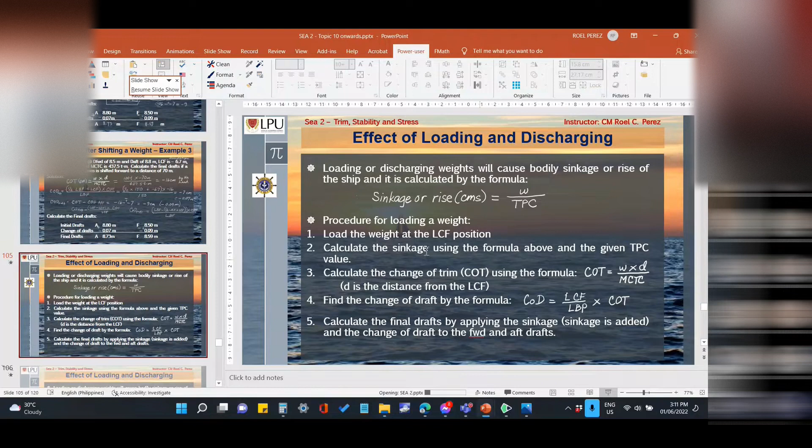Tons per centimeter immersion, or TPC, as the term itself suggests, is the number of tons displaced when the vessel is immersed by 1 centimeter.

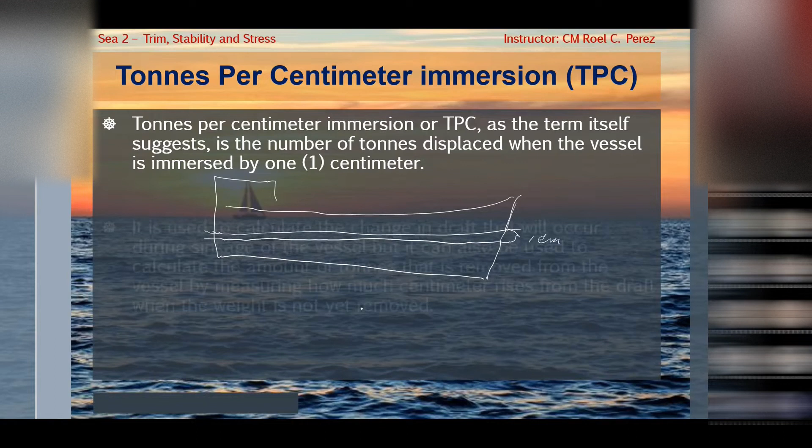So if you slice the ship by 1 centimeter, then weigh the water inside that slice, that is the TPC, which is already tabulated, and I will show you.

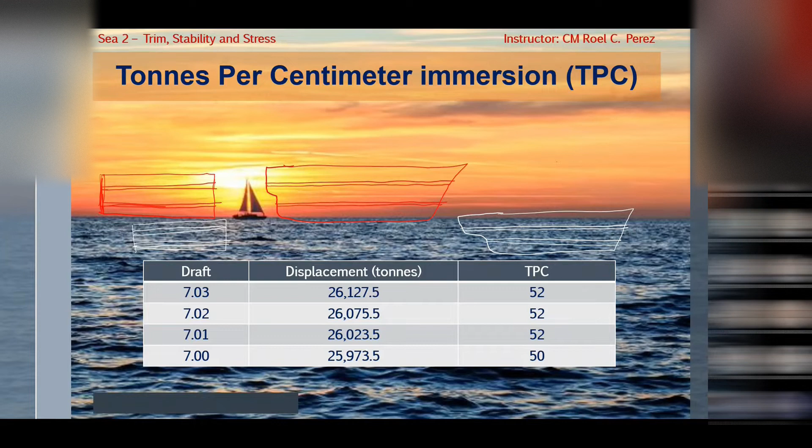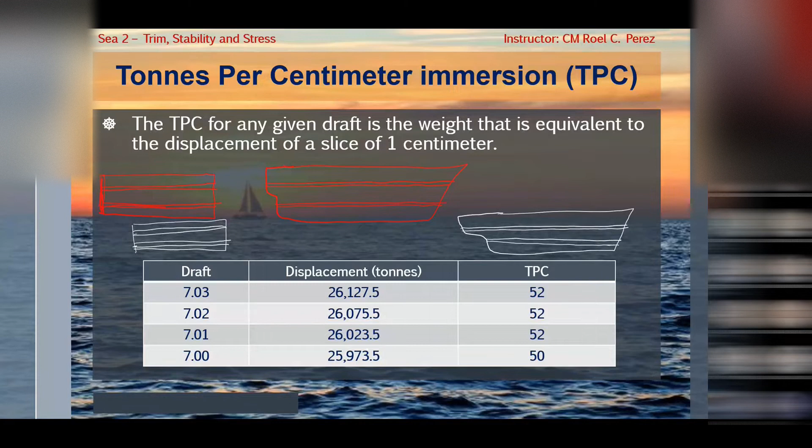The TPC for any given draft is the weight that is equivalent to the displacement of a slice of 1 centimeter.

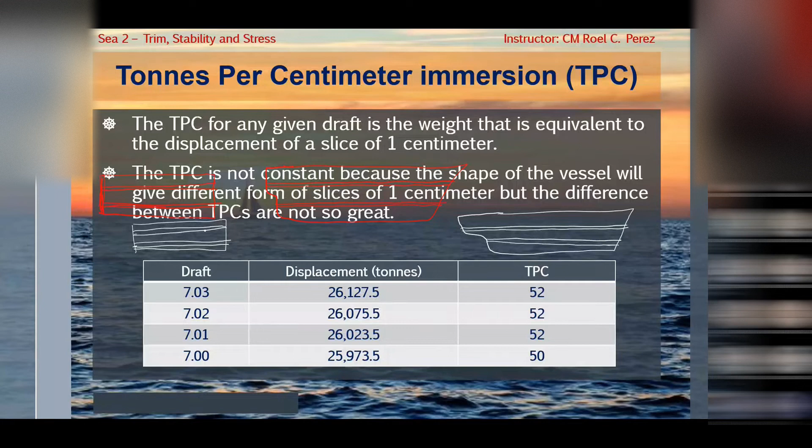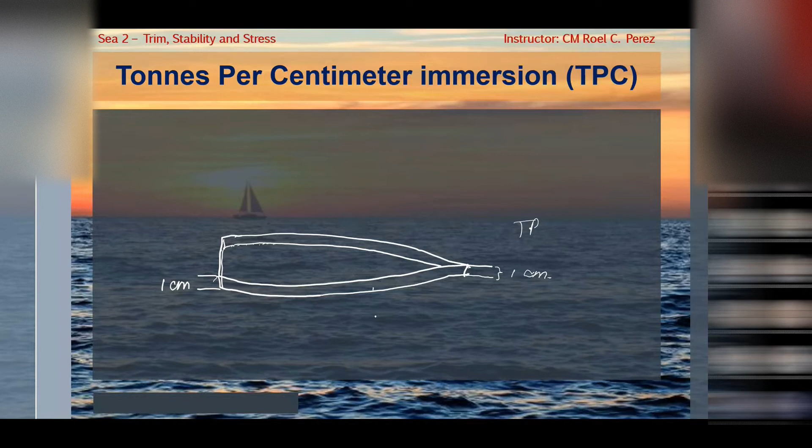If we are going to measure the water inside this slice, that is the TPC, tons per centimeter immersion.

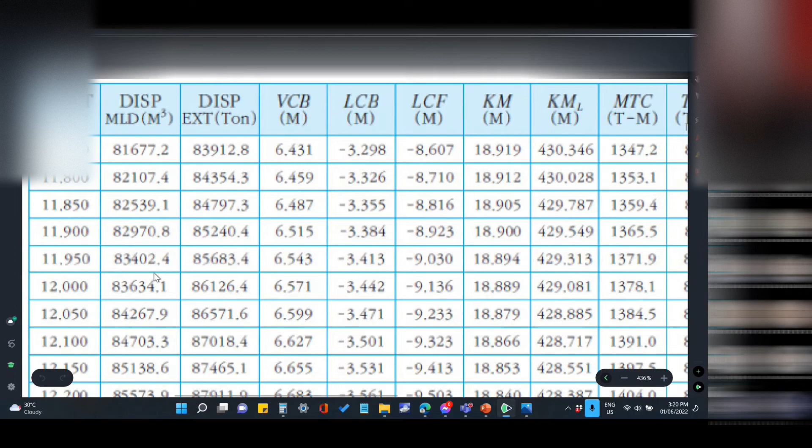Okay, so let's go back to that, we can now use the formula for sinkage or rise, that is weight divided by the TPC.

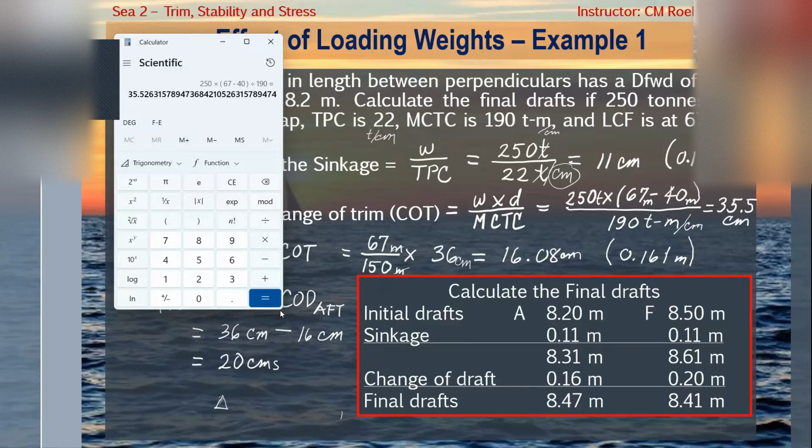And that is change of, that is positive. So what do you call that? Positive, that is by the stern. And then next is calculate the change of draft aft.

That is LCF over LBP times change of trim. So that is 67 LCF meters divided by 150 meters. Cancel the meters, then multiply it by what we got, 36 centimeters. It will give you 16.08 centimeters, which is 0.16 meters.

And then change of draft forward is equal to change of trim minus change of draft aft, that is 36 centimeters minus 16 centimeters is equal to 20 centimeters. So the results are positive.

Okay, so this is always add. Calculate the final draft. So your initial draft is 8.20, forward is 8.50, that is trim by the head. Now, always plus here, even in rise. For rise, supposed to be we subtract, but the formula will always be plus.

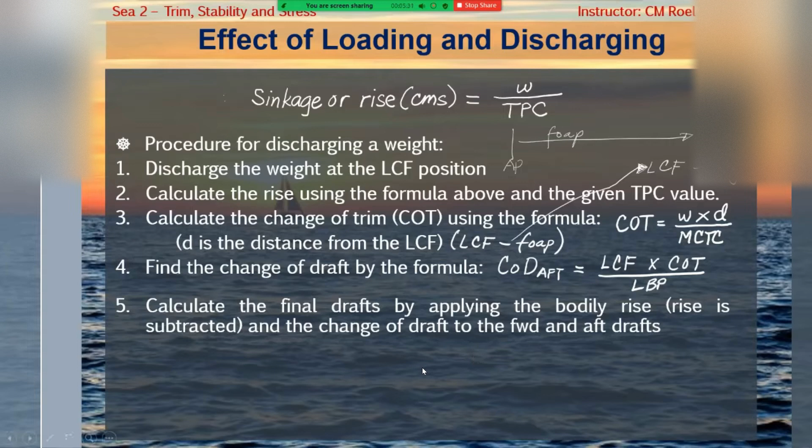So, okay, we also have a sample here: a ship of 150 meters in length between perpendiculars has a draft forward of 8.5 meters and draft aft of 8.2 meters. Calculate the final drafts if 250 tons is discharged, 130 meters FOAP, TPC is 25 tons per centimeter, MCTC is 190 tons meter per centimeter, and LCF is at 67 meters FOAP.

Okay, so we calculate the bodily rise, that is weight over TPC. That is negative 250, remember that we are discharging, so our weight is negative. Remember that, we always do that. So that is negative 250 tons divided by your TPC, which is 25 tons per centimeter. Tons and tons can be cancelled, your remaining unit will be in centimeters. So that is negative 10; 250 divided by 25 is 10, you don't need a calculator for this. That is negative 10 centimeters, converted to negative 0.10 meters.

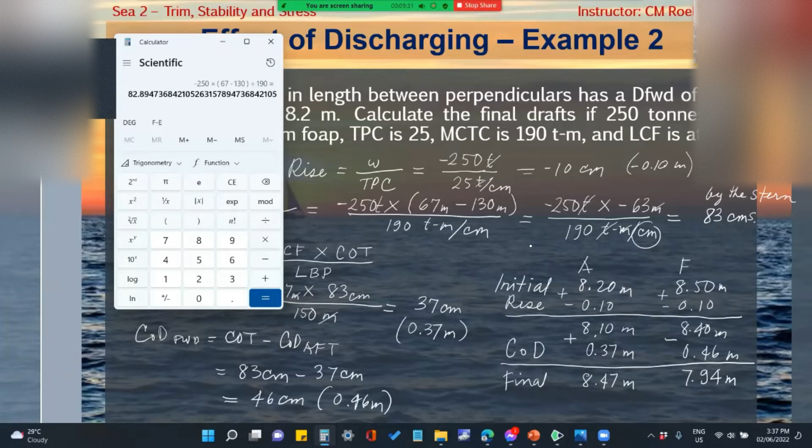Do we still need to think, do we still need to draw this? Just adhere to my rule, which is positive will be by the stern. So that's positive, by the stern. And remember that you are discharging.

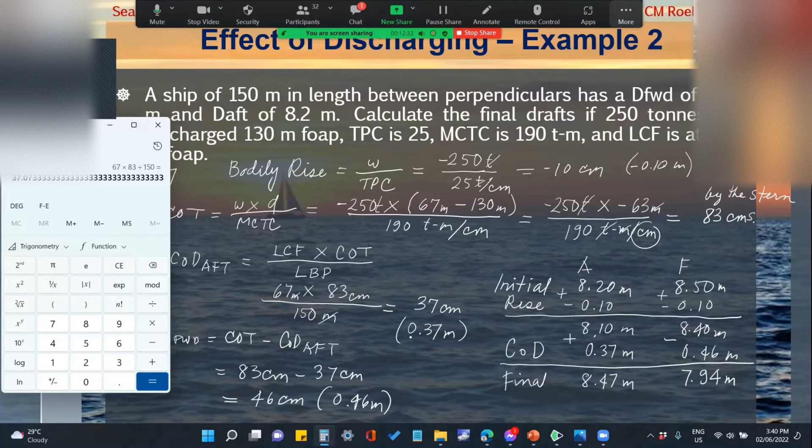And then forward, change of draft forward, that is equal to change of trim minus change of draft aft. That is 83 centimeters, our change of trim, minus change of draft aft, that is 37 centimeters, will give you 46 centimeters, or 0.46. Okay, and then we will calculate the final trim or final drafts.

Final drafts. Okay, to calculate the final drafts, your initial draft is 8.20, that is your aft draft. 8.50, that is your forward draft, so that's sub, right? Trim by the head. And then we have rise.

Okay, so remember that your rise is always added. Your sinkage and rise is always added, because your rise will give you negative results. So that's negative, that will automatically be minus. Okay, so that is 8.2 minus 0.1 is 8.1.

8.5 minus 0.1 is 8.4. Still sub, right? Still trimmed by the head.

And then change of draft, that is your change of draft aft is 37 centimeters, 0.37 positive, and for the forward is 0.46 positive. And remember that aft is always plus and forward is always minus. You don't have to think, just let the rule and the calculator get it right.

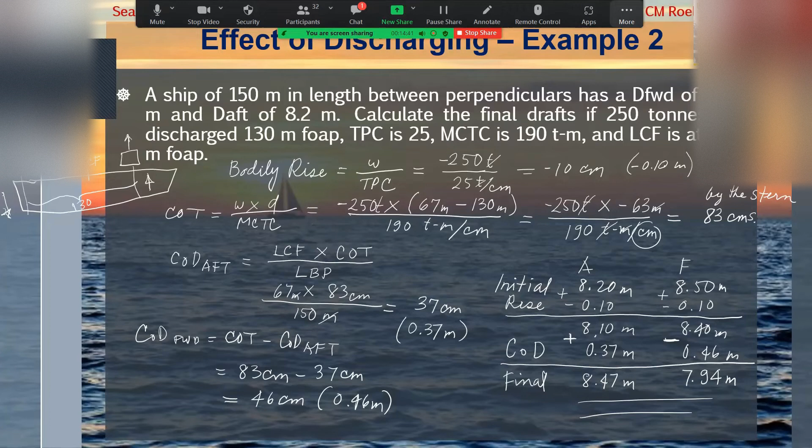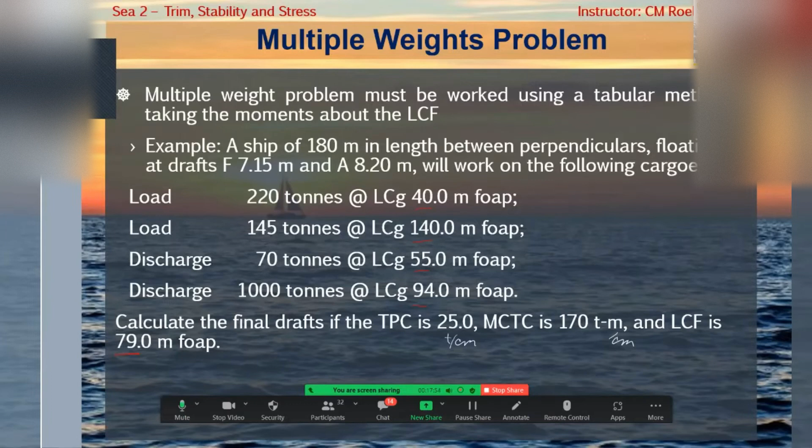Example: a ship of 180 meters in length between perpendiculars, LBP, floating at drafts 7.15 forward and 8.20 meters aft, will work on the following cargoes. We need to load 220 tons at LCG 40 meters forward of aft perpendicular, load 145 tons at LCG 140 meters forward of aft perpendicular, discharge 70 tons at LCG 55 meters forward of aft perpendicular, and discharge 1,000 tons at LCG 94 meters forward of aft perpendicular. Calculate the final drafts if the TPC is 25 tons per centimeter, MCTC is 170 tons meter per centimeter, and LCF is 79 meters forward of aft perpendicular.

Okay, so I will show you two methods. One is coming from the book, and one is coming from me - this is my technique. It's up to you which one you want to use. Maybe it's better to use the one from the book rather than mine, depende kung may tiwala kayo.

Okay, let's see. This is from the book. As you can see, if you remember, this one is to be loaded, this one is to be loaded, this one is to be discharged, and this one is to be discharged also.

This is taking the moments about the LCF, so our distance should be measured from the LCF. Remember the KG table - our moment is about the keel, so our distance there is about the keel, which is KG. Whereas here, this is taking the moments about the LCF, so our distance is coming from the LCF.

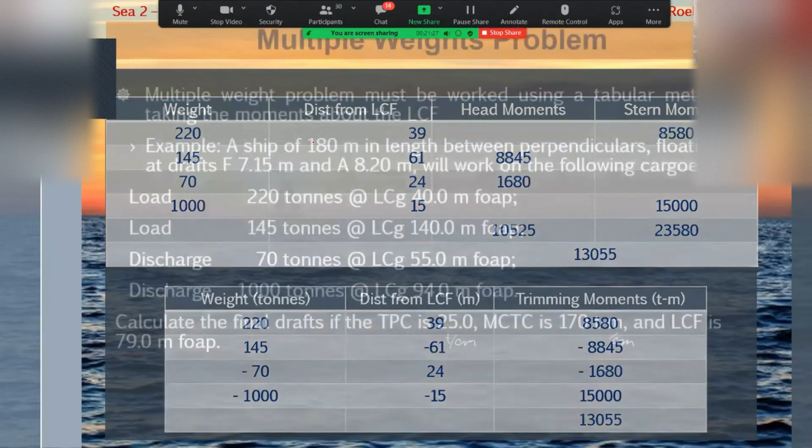Our LCF is 79 meters minus our LCG. Our LCG values are 40, 140, 55, and 94. So we subtract these from LCF. The result is 39, 61, 24, and 15.

Now we are going to multiply this 220 times 39, that is equal to 8,580 stern moments. But why did it become stern moments? How do you know it goes there and not into head moments?

That's from the book - it has an explanation of course, which I will tell you. Okay, so if this is your vessel,

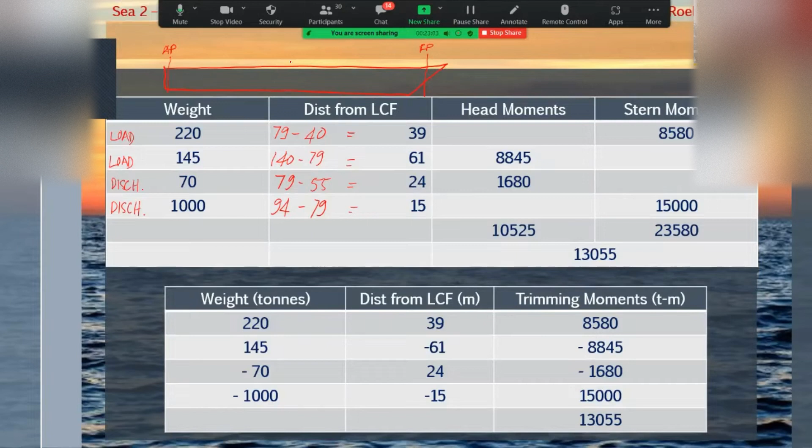remember that your LCF is - your vessel is 180 meters LBP. So if this is your aft perpendicular and this is your forward, from aft perpendicular to here is 180 meters. Your LCF is at 79, somewhere here, not at the center. 79 meters, that is your LCF.

Now we are going to load 220 tons. Remember that this is tons, this is meters, this is tons-meter, and this is tons-meter also, so I won't keep writing tons-meter - that's understood now.

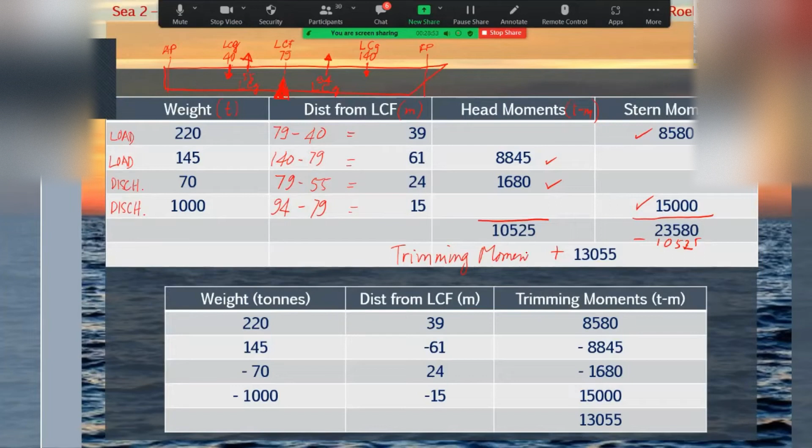This is from the book. You subtract the head moments from the stern moments to obtain the trimming moment. That's what we call the trimming moment. This is your trimming moment. Can you follow that or not?

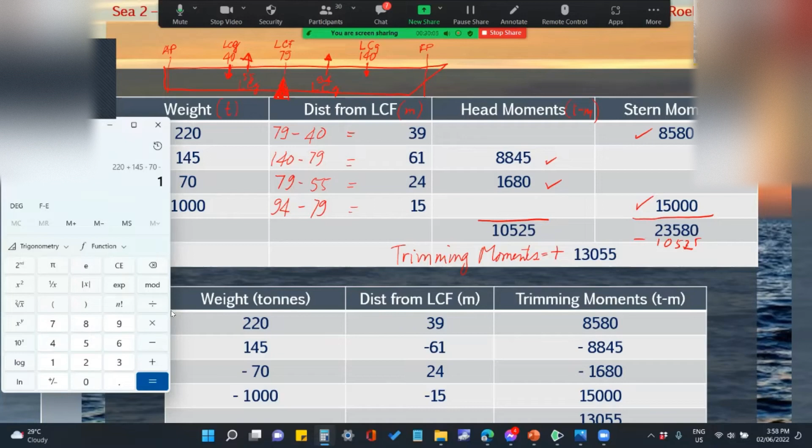So now let's use our calculator. That is 220 plus 145 minus 70 minus 1,000 equals. So we immediately get a total, which is negative 705 tons.

Remember our rule: distance is equal to LCF minus LCG. So here it becomes 79, that is your LCF. 79 minus 40 equals 39. Minus 140 equals negative 61. Minus 55, that is 24. And the other one is 79 minus 94, that is negative 15.

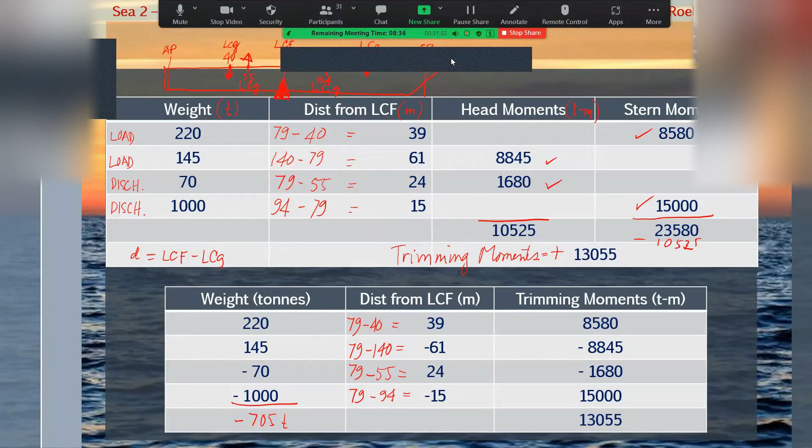And 220 times 39, that is 8,580 positive. 145 times negative 61, that is negative 8,845. And then negative 70 times 24, that is negative 1,680. And then negative 1,000 times negative 15, negative times negative is positive, that is positive 15,000. And if you take the algebraic sum of this, the result will be 13,055. That is your trimming moment and it is positive.

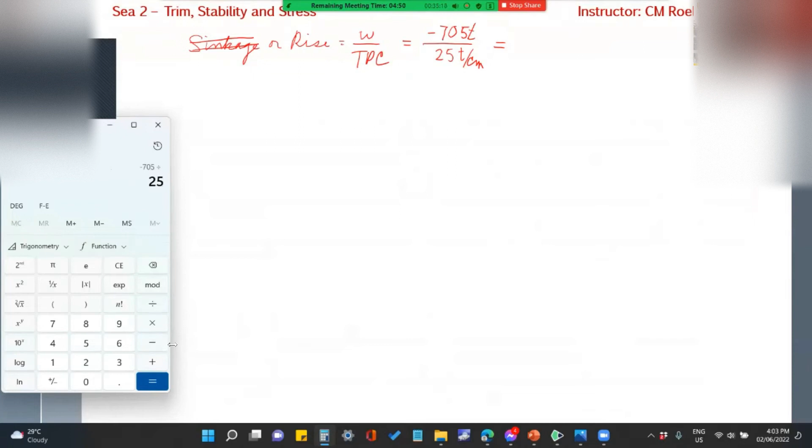That is divided by the TPC. Our TPC, I believe, is 25 tons per centimeter. And this one is in tons. So that is equal to, okay let me show you with the calculator: 705 divided by 25, that is negative 28 centimeters. Why centimeters? Remember, this is tons over tons per centimeter, the tons cancel out, leaving centimeters. So this is negative 28 centimeters. If you include the decimal, this is 0.28 meters.

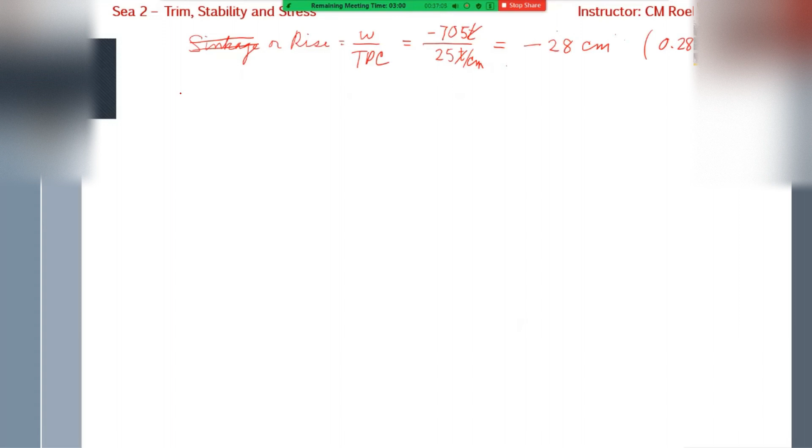Okay, next step is our change of trim. What's the formula for change of trim? That is weight times distance. Remember, weight times distance is moment, so we use the trimming moment.

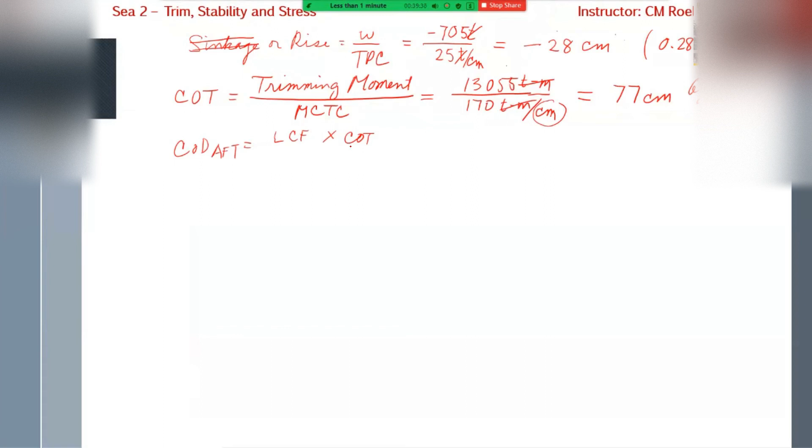Okay, our LCF is 79, change of trim is 77 centimeters, divided by 180 meters, that is your LBP. Cancel the meters in both, centimeters remains.

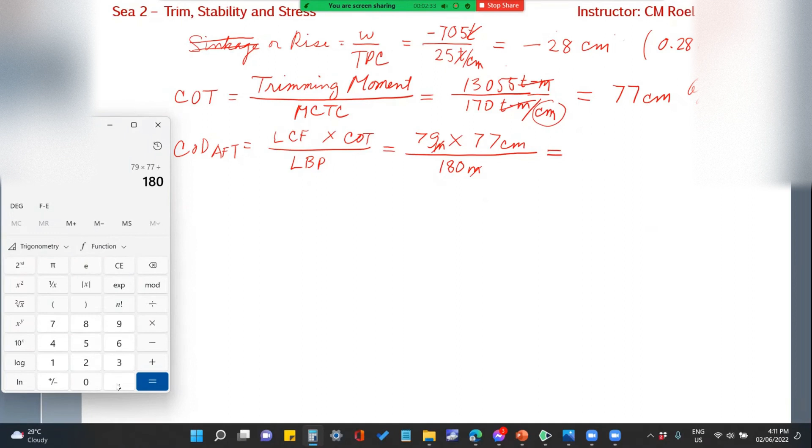So this is 79 times 77 divided by 180. That is 33.79, that is 34 centimeters positive. So this is 34 centimeters, divided by 100, it is 0.34 meters.

And then your change of draft forward is equal to the change of trim minus the change of draft aft, that is equal to 77 centimeters minus 34 centimeters, that is 43 centimeters, that is 0.43 meters.

Okay, the last step is we need to calculate the final draft, and apply the change of trim, which is the change of draft.

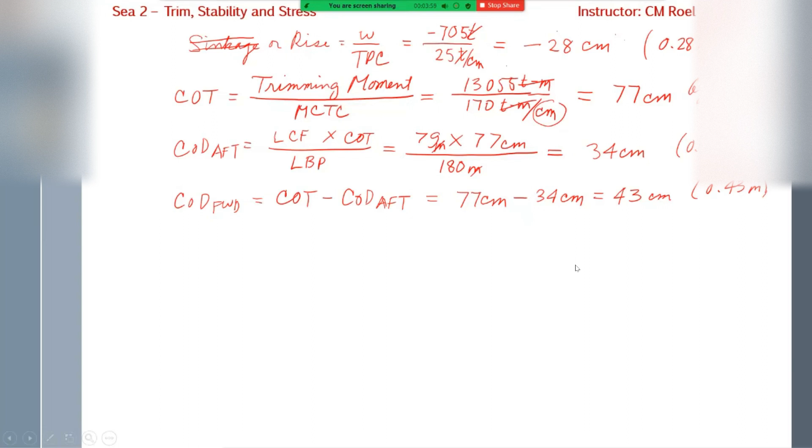So here it is, so you won't have a hard time. Your initial draft is 8.20 meters, 7.15 meters forward, and your rise is negative 0.28, so we can cancel the sinkage there.

That is 7.92 and 6.87, minus that, and then your change of draft will be 0.34. As I said, this is always plus in the aft position and always minus in the forward position. So that is plus, that is 8.26. This one is subtract 0.43, will be 6.44. That is by the stern.

And remember that this is by the stern too, this is by the stern also, this final draft will be by the stern. So that will be your answer. That is what you will give me, including the solution.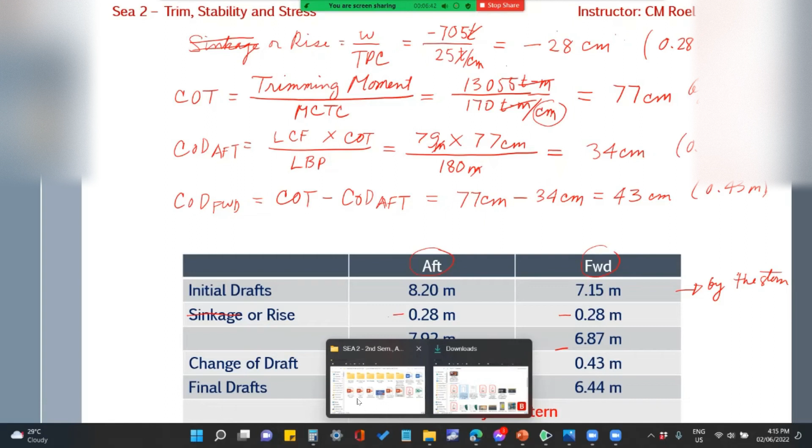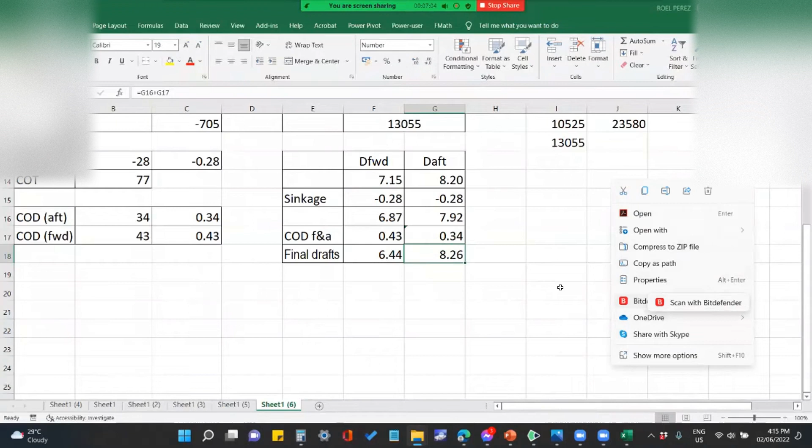Multiple weights. Okay, let me delete this. Okay so you see, this is my program.

You see, this is LCF 79, if you remember. TPC is 25, then MCTC is 170, 180 is your LBP. And then this one is draft forward and this one is draft aft.

Now, our weight, I'll just put the weight there: 220, 145, minus 70, minus 1000. So it automatically does the auto sum. And then I'll just put the LCG here. Then our program automatically, you see, takes from the formula bar that is $sign B1.

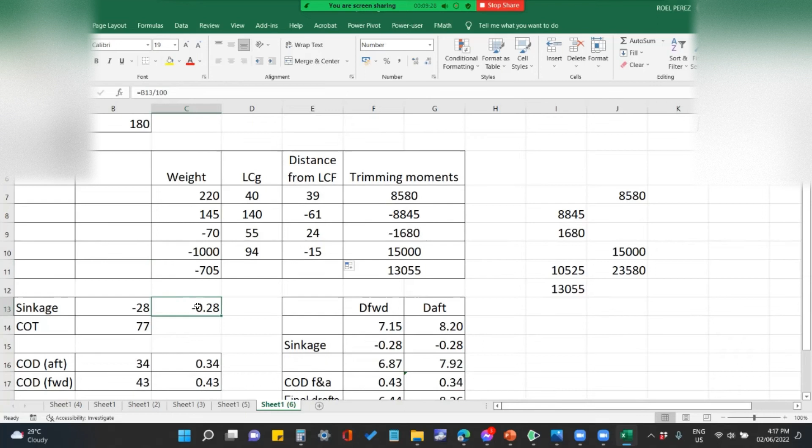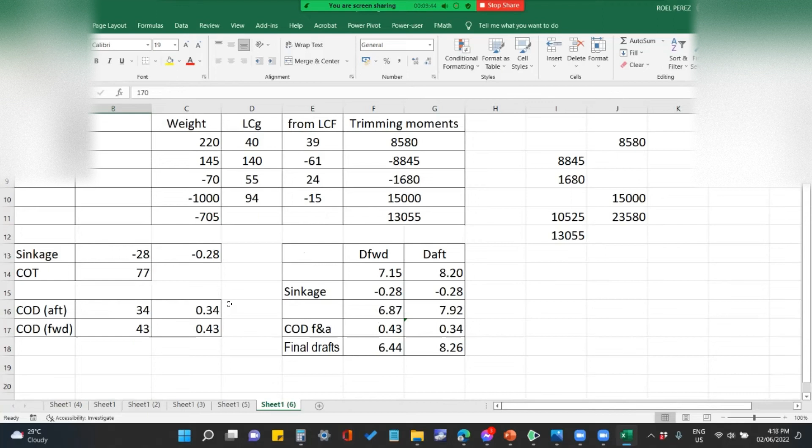Then here is the change of trim, which is F11. F11 is the trimming moment, divided by B3. What is B3? MCTC.

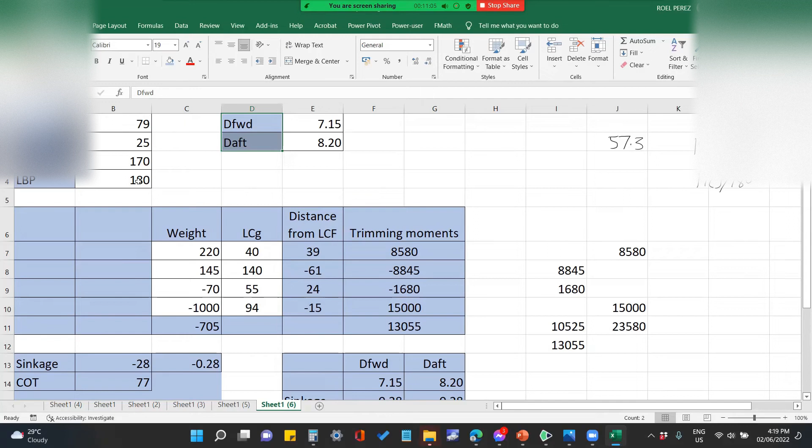Put color on everything that's automatic. The only one not automatic is the white one. So all those are automatic. You need to put the LCF, you need to put the TPC, MCTC, LBP, initial draft forward and aft, then the weight.

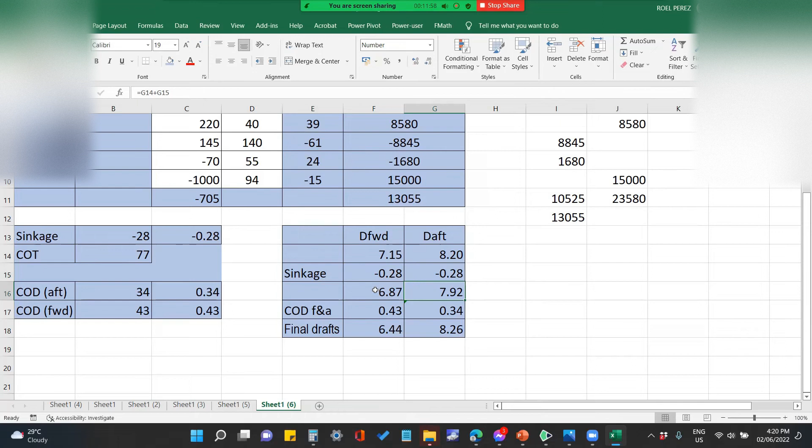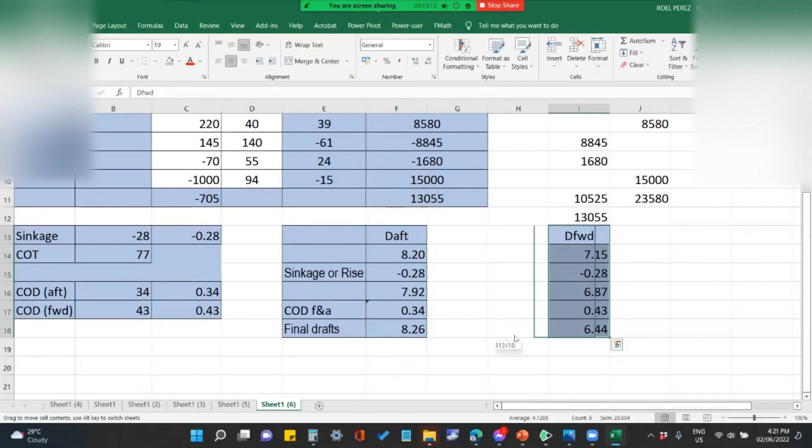But we can transfer that para magaya yung aking turo. Pareho din ang result niyan, so wala problema. Tanggalin nga natin to.

Okay, so remember, madali lang yan dahil wala tayong trigonometric function. Pero kung sakaling may trigonometric function, tinuro ko na rin sa inyo na you need to use 57.3, o kaya 180 divided by pi, tapos open and close parenthesis, o kaya pi close and open parenthesis divided by 180. So yan lang mga conversion sa ano ha.

Tanggalin ko na muna dito. Yan ang mga conversion sa tawag doon sa trigonometric functions, no? Kasi radians yun eh, so ikaw convert mo to degrees. Okay, so nakita nyo, meron tayo niyan.

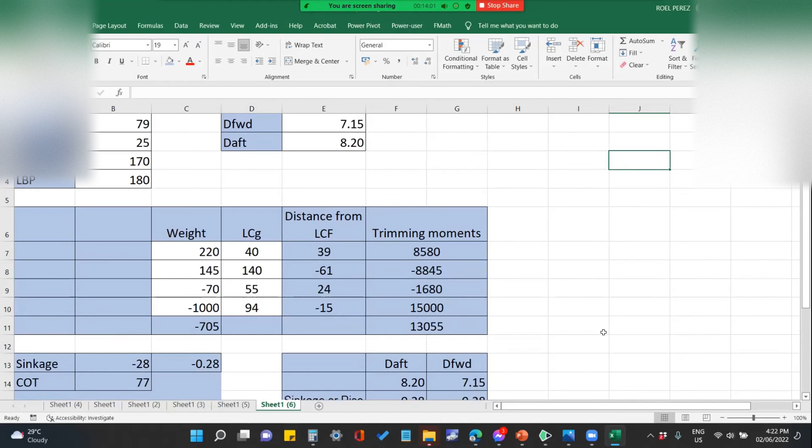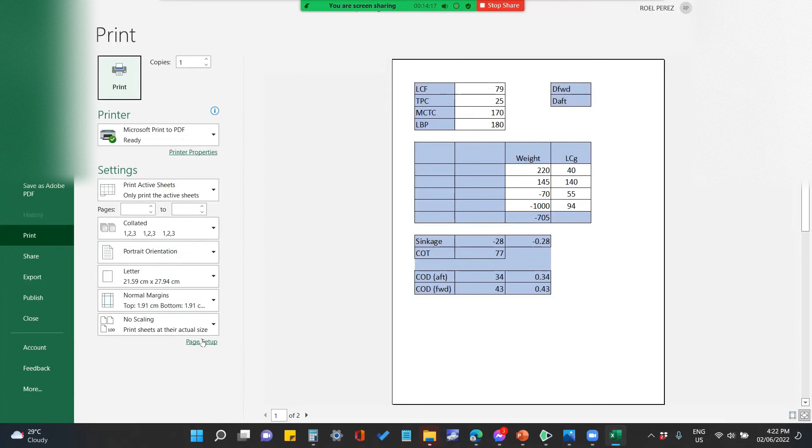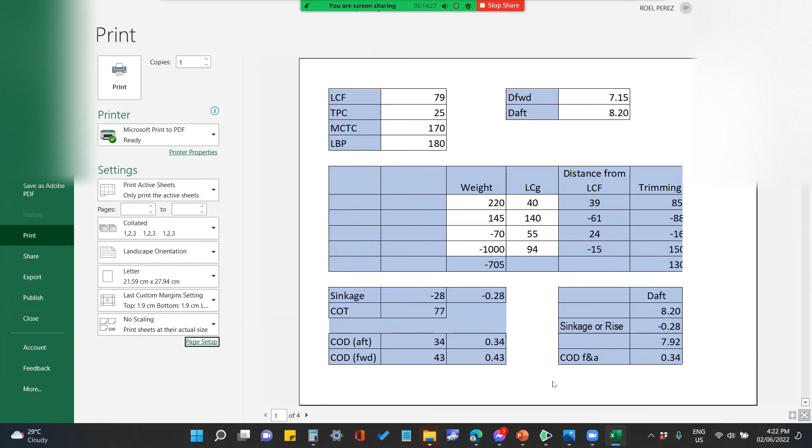And okay, so let me check kung paano natin, so dapat naka ano siya, naka page set up landscape. Pag naka landscape, hindi pa rin siya kuha. Okay, so hindi siya kuha. Wait, ayusin lang natin yan, dali lang yan. Dito masyadong malayo, para isang page lang. Yan, no?

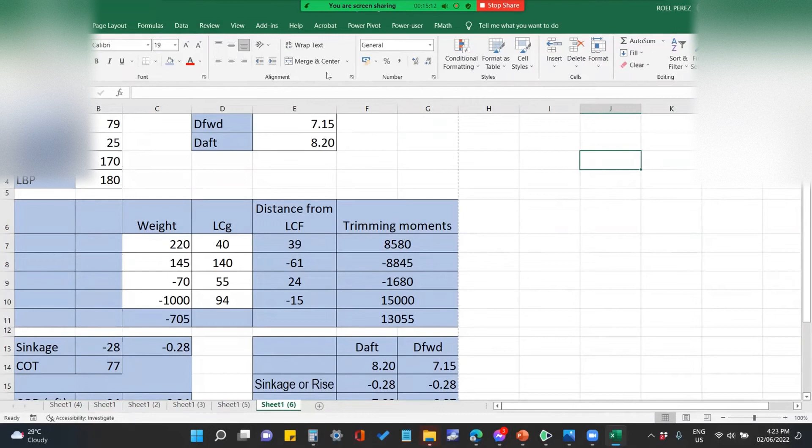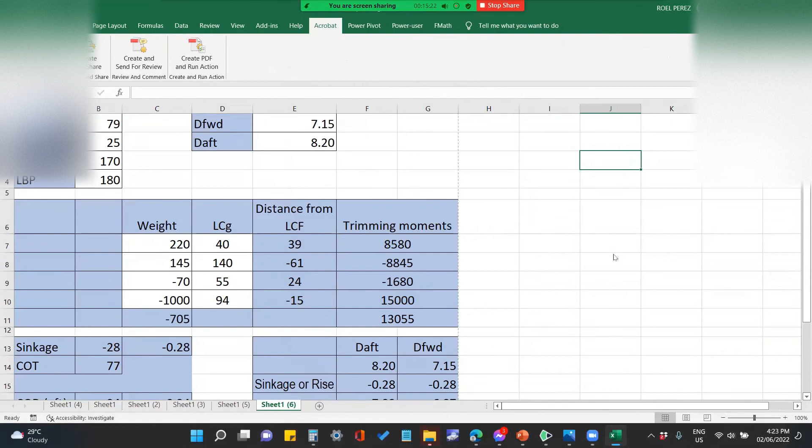Control P. Okay, so isang page lang, no? Ngayon, pwede na natin yan i-convert sa PDF para yan ang submit nyo. I will accept that. Okay, convert natin sa PDF. Okay, so Acrobat, create PDF, convert to PDF. Yes. Save.

Okay, so nakita niyo, no? Any question regarding that? Mukhang naintindihan niyo naman, ano?

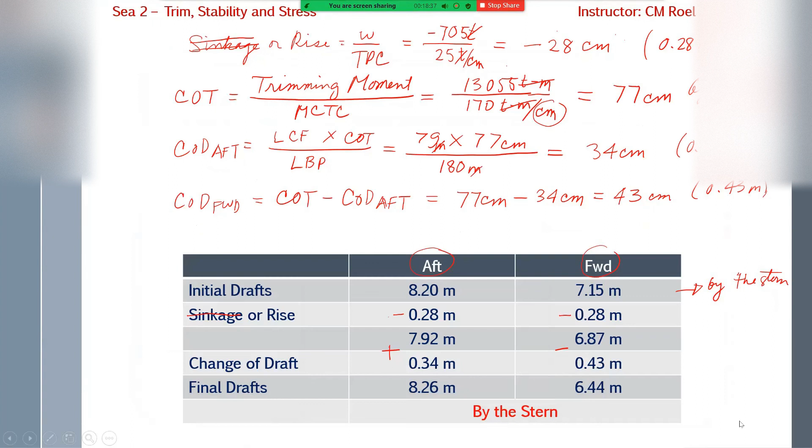Okay, so this is way to shift to reduce the trim by a chosen amount, no? Ibig sabihin, we are going to shift a weight, probably ballast, para ma-reduce natin yung trim doon sa gusto niyong amount, no? So, for example, ikaw ay napakalaki ng trim, 2 meters, gusto mo na half meter lang, okay, so you can do that, ano?

Okay, so here is your example: a ship of 150 meters in length between perpendiculars has a draft forward of 8.2 meters and draft aft of 9.40 meters. How much ballast water must be transferred from the after peak tank, LCG? Okay, so remember na yung LCG dyan is small g, pinaliwanag ko naman kanina kay capital G yan, basta we are talking about the tank or the cargo, that is the LCG of the cargo, no?

LCG 4 meters forward of AP to the fore-peak tank, LCG 142 meters forward of AP, no? To reduce the trim to 0.4 meters by the stern, if the MCTC is 190 tons meter per centimeter. Tandaan mo na, basta yung MCTC at saka TPC laging per centimeter yan, ano, kahit na nakalagay diyan tons meter lang, no? So anong gagawin natin diyan?

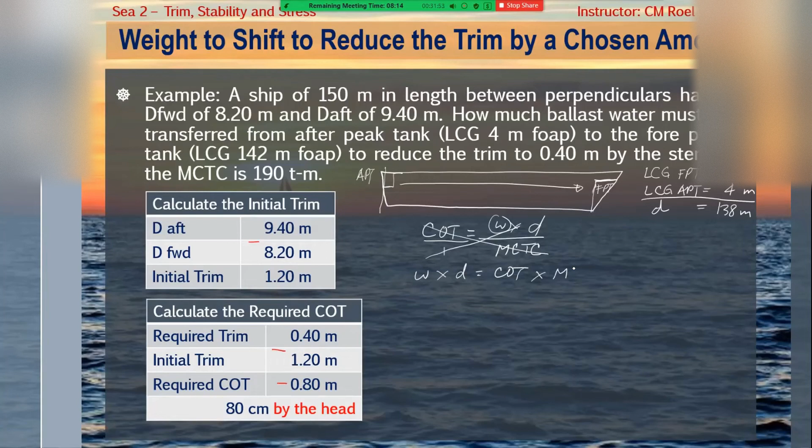Ngayon, multiply both sides by 1 over distance para makansel natin distance, and then 1 over distance. Then your formula will be weight is equal to the change of trim times MCTC divided by the distance.

Okay, weight now is, yung ating change of trim is 80, which is negative 80, no? Centimeters. Times, ang ating MCTC is 190 tons meter per centimeter, and that is divided by the distance of 138 meters, no?

138 meters. So yung weight mo ngayon is equals, okay, so you can cancel yung centimeter kasi dito is over centimeter, you can cancel that, no? Tapos ito naman meter dito, you can cancel with the meter here. So maiwan will be tons. Okay, so we can solve now. That is

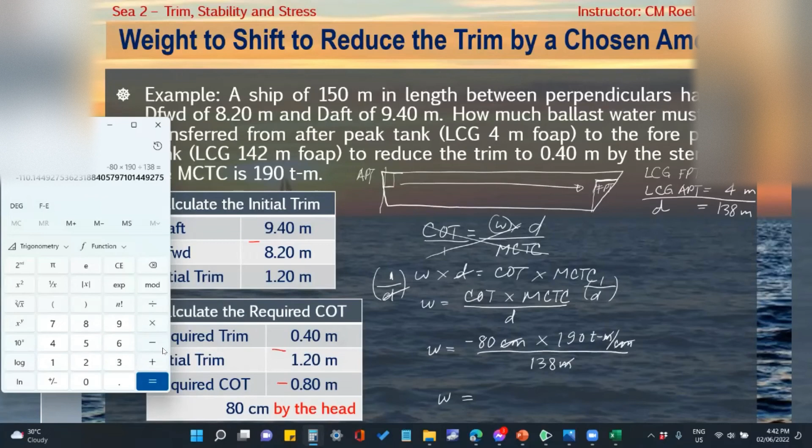80. Okay, so 80, ulitin natin, 80 negative times 190 divided by 138 will give you 110.14, no? So that is 110.14.

No? And actually, this is negative, no? Negative 138 kasi that is supposed to be ganito, no? Okay, burahin ko to para maintindihan nyo. Kasi papunta tayong forward. Remember that working forward is negative, no? Working forward is negative.

So your LCG after peak tank, that is 4 meters. LCG fore peak tank, that is 142 meters. Your distance will be, okay, minus mo yan. That will be, your distance is negative 138 meters. So here we will use negative.

So your answer is negative times negative will become positive, no? Okay, so that is the required weight that will be transferred to the fore peak tank or shifted to the fore peak tank, no? Pero siyempre, you do not know what is the amount of this. Kaya ang gagawin natin yan is we need to transfer it to volume.

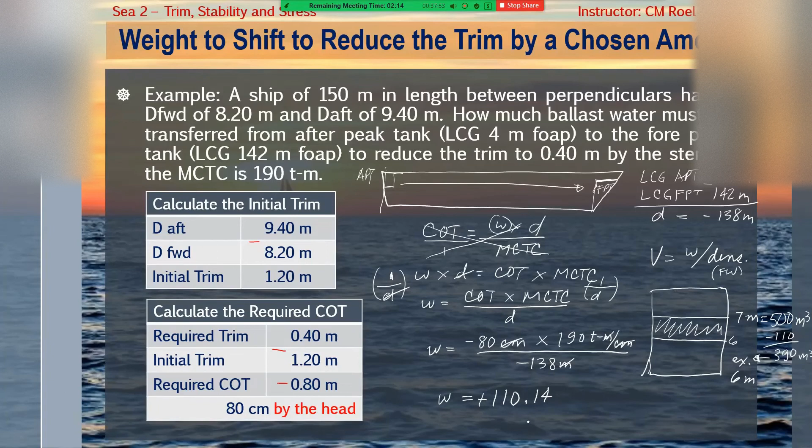Okay, so let's go to the last topic, last problem. This is the weight to load to bring the ship to even keel, no? So ano naman to, no? Kakarga mo naman yung iyong barko so that your vessel will become even keel. Ibig sabihin, kung if your vessel is trimmed by the stern, ganyan, then we need to put somewhere here a tank, normally the fore peak tank. Lagyan natin ng tubig, yung punuin natin para magpantay, maging even keel, no? Even keel siya. Okay, so here is an example.

A ship of 150 meters in length between perpendiculars has a draft forward of 8.20 meters and draft aft of 9.40 meters. How much ballast water must be pumped into the fore peak tank, LCG 142 meters FOAP, to bring the ship to an even keel if the TPC is 25 tons per centimeter, MCTC is 190 tons meter per centimeter pa rin yan, kasi MCTC, and LCF is 67 meters FOAP. Calculate the final draft. So ito naman ay galing sa dagat yung ikakarga mo because that is pumping in ballast water, no?

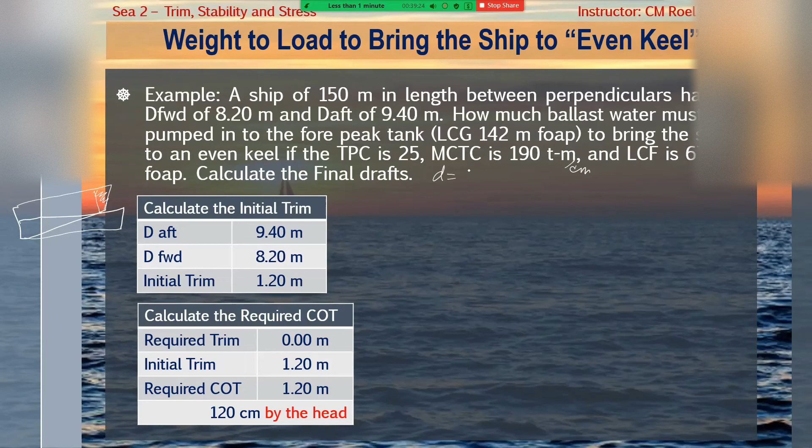So pagka ganyan naman, your distance will be from the LCF. Kaya distance ngayon, that is LCF minus LCG. O kaya pwede rin na LCG na magano, no? LCG na maliit. So your distance will be, ano LCF natin? LCF is 67 minus 142.

That is equal to 67 minus 142, which is negative 75. That is your distance, meters.

Okay, so the next step is to calculate the initial trim. Draft aft is 9.40 and draft forward is 8.20. So our initial trim is by the stern, that is 1.2 meters.

The next step is to calculate the required change of trim. What is our required trim? The required trim is zero trim, because we need to put the vessel to even keel. Even keel means zero trim. So that is zero, and your initial trim is 1.20 meters. So you subtract that.

If you remember, here we also had a minus. So here, subtract that. And your answer will be: your required change of trim is negative 1.20, that is 120 centimeters by the head.

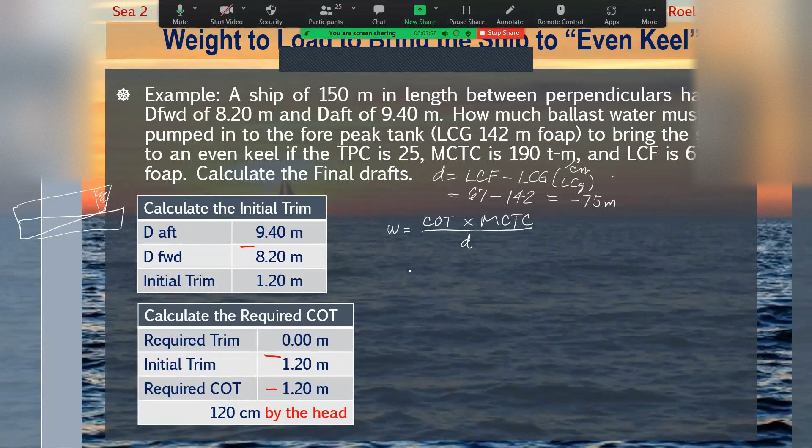Our change of trim is 120, by the head, so negative 120 centimeters. The MCTC is 190 tons-meter per centimeter. Divide it by the distance, which is negative 75 meters.

Okay, so your answer will be in centimeters. We can cancel the per centimeter since it's over that, and we can also cancel the meter. So the result will be your weight in tons.

120 negative times 190, divided by 75 negative. That is 304, positive. You see that is positive. So that is 304 tons. It's positive because we're going to load that, so it's positive — we're going to pump that in from the sea to the forepeak tank.

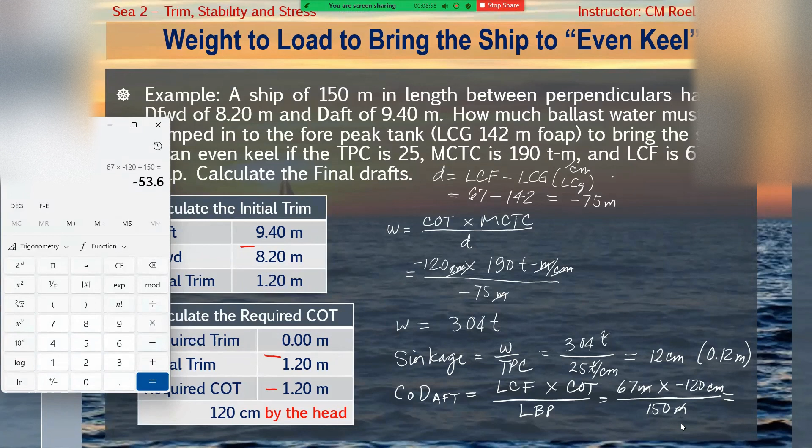Let's calculate. As you can see here, this is 67 times negative 120, then divided by 150. That is negative 53.6, so negative 54. That is negative 54 centimeters, or 0.54 meters.

And then let's get this — let me write it up here. Change of draft forward equals change of trim minus change of draft aft. So that equals change of trim, which is 120 centimeters negative, minus the change of draft aft, which is minus negative 54 centimeters. So this becomes positive — positive and negative will become negative. So 120 minus 54 equals 66, negative 66 centimeters.

And then we apply now. We calculate the final draft: that is 9.40 and 8.20, and then your sinkage is 12. Remember this is always plus, whether it's sinkage or rise. So that is 9.52 and 8.32.